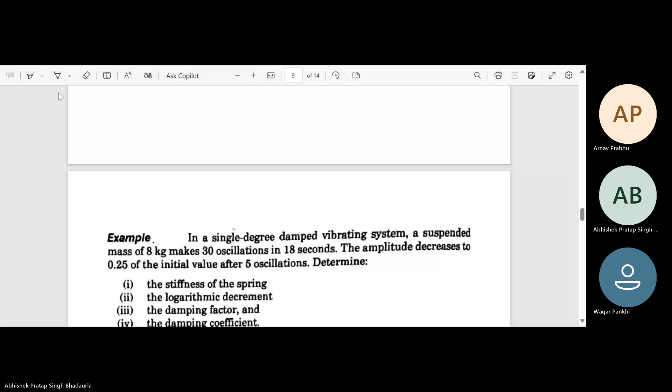So I'm going to share the screen. Can you see my screen properly? Yes, sir. Okay. So we had solved this problem last time. Now this is the problem we have to solve. I'm providing you 2 minutes.

Solve this problem. Determine the time in which the mass in a damped vibrating system would settle down to 1/50th of its initial deflection for the following data. The mass is 200 kg, epsilon, the damping factor, is 0.22, and S, the spring stiffness, is 40 Newton per mm. We also have to find the number of oscillations completed to reach this value of deflection. Take 2 minutes and try to solve it, and then we'll discuss the approach together.

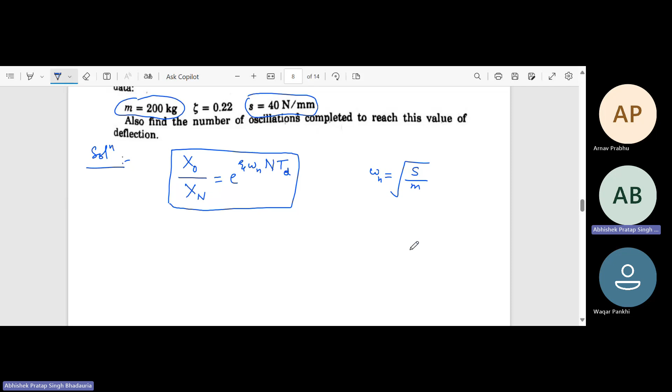The spring stiffness value is given as 40 Newton per mm, and the mass is also given. So put the values in this expression and you can calculate the natural frequency. So tell me, what is the value of this natural frequency? How much is it?

40 Newton per mm. Convert mm into meters, so 10 to the power minus 3 meters in the denominator goes to the numerator as 10 to the power 3. That means 40 into 1000 Newton per meter.

Okay, 40 into 1000 Newton per meter, and the mass is 200. So you can calculate the omega n value. So the calculated value of omega n is 14.14. What is the unit of omega n? Radian per second. Okay, this is the unit.

Now we have calculated this omega n. The epsilon value is given, the n value we need to find, and td is also required. Okay, so this is also required. So we'll see how to calculate this. So n td is unknown, so we'll put the value.

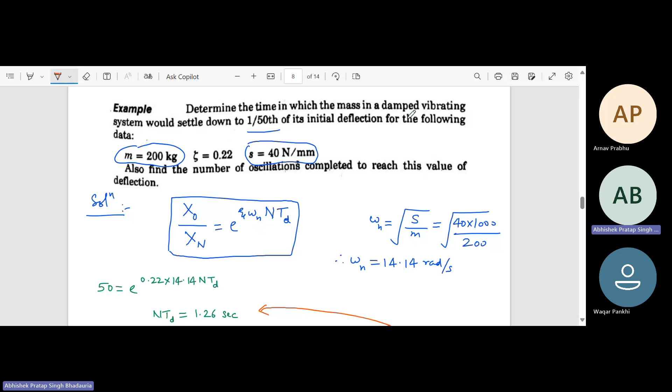This was asked, right? We have to determine the time in which the mass in a damped vibrating system would settle down to 1 by 50th of its initial deflection. So we have determined this time value, time period, and then after this we have determined the number of oscillations completed to reach this value of deflection. Okay, so this is the answer. N is equal to 2.76. Right?

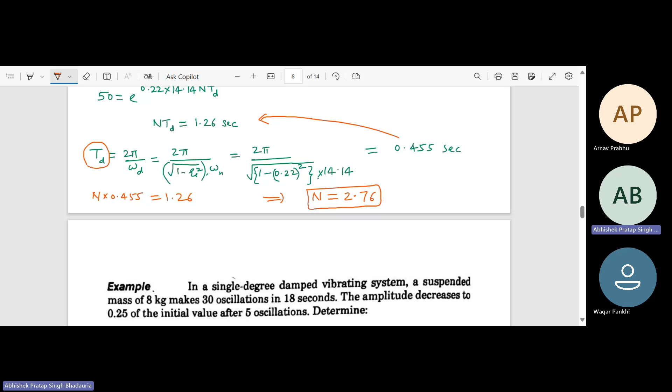Do this. In a single degree damped vibrating system, a suspended mass of 8 kg makes 30 oscillations in 18 seconds. The amplitude decreases to 0.25 of the initial value after 5 oscillations. Now we have to determine the stiffness of the spring, logarithmic decrement, damping factor, and the damping coefficient. So do this and tell me. Just take 1 minute.

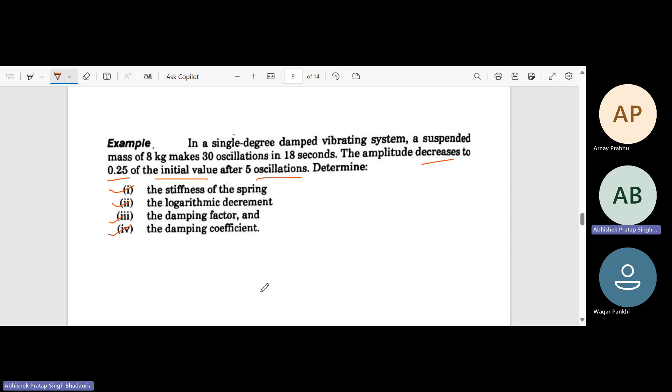Okay, so let's solve this problem. First of all, we'll find the first one. What is the first one? The stiffness of the spring. So let me write what is given in the problem. So what is given? Sir, mass is 8 kg, it makes 30 oscillations, and time is 18 seconds. Yes, mass is 8 kg.

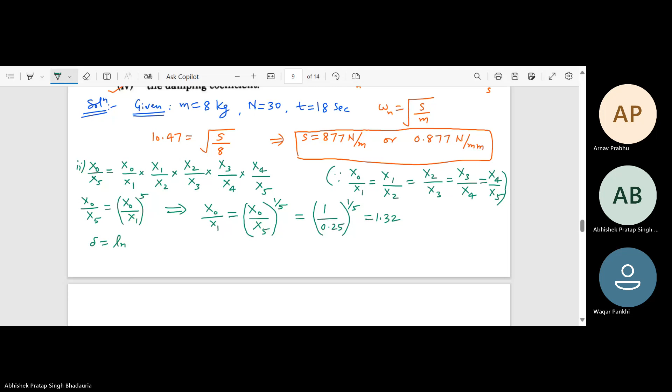So what is the delta? Delta is the logarithmic decrement. It is the natural logarithm of this amplitude ratio. So it is the natural logarithm of 1.32. So the answer is 0.278. This is the logarithmic decrement. So we have calculated logarithmic decrement also. Now let's calculate damping factor.

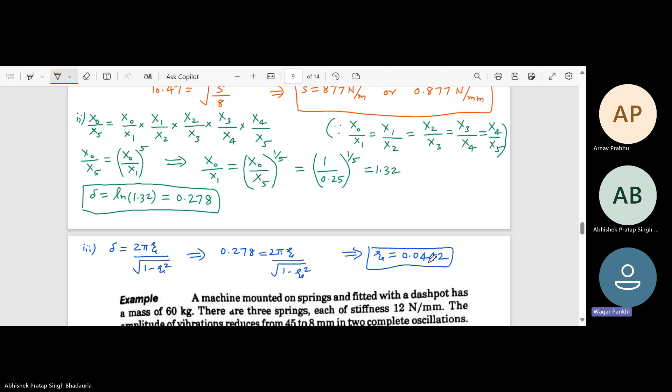So 2 into mass is 8 kg. Omega n, I've already calculated this, this is 10.47. And what is the value of epsilon? Epsilon we just calculated, 0.0442. We just solve this. So the value of C is 7.4 Newton per meter per second. So this is the answer. So we have calculated all the four.

Such type of problems are already asked a number of times in the exam. So understood? Okay, now let's solve another one.

A machine mounted on springs and fitted with a dashpot has a mass of 60 kg. There are three springs, each having stiffness 12 Newton per mm. The amplitude of vibration reduces from 45 to 8 mm in two complete oscillations. Assuming that the damping force varies as the velocity, we have to determine three things: the damping coefficient, the ratio of the frequency of the damped and undamped vibration, and the periodic time of the damped vibration. Think over it. I am providing you 1 minute, and then we'll solve this problem together.

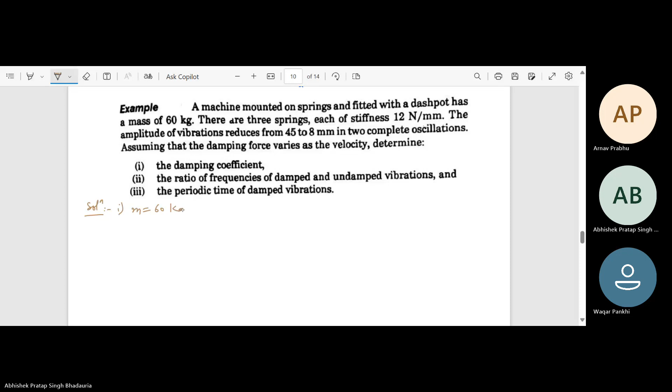So let's see, the mass is given as 60 kg. Stiffness is given as 12 Newton per mm.

So what is this - each, you can see here 3 springs are there and each having stiffness 12 Newton per mm.

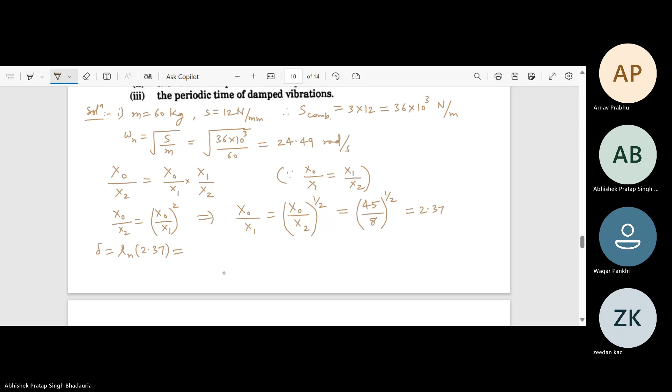Now we know the formula for delta - delta is equal to 2 pi epsilon divided by square root of 1 minus epsilon square. Just put the value of delta here, from here you will get one equation, one unknown, that is epsilon. So epsilon value you can find, the calculated value of epsilon is 0.136.

Okay, so we have calculated this damping factor, that is unitless. We know this, the damping coefficient, that is epsilon, that is 0.136. So done, first one we have solved. Okay, now let's work for the second one.

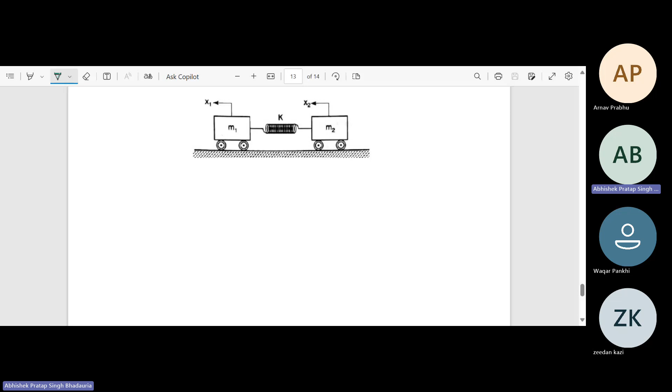Now we will move to module 2. More than half of module 2 is also already done. Just a few concepts remain which I will discuss, and then we will be able to finish module 2 as well. About 60 to 65% of module 2 is over. We just need to cover the remaining concluding part on tires, and we will be able to finish the entire syllabus for ISC, which is module 1 and module 2, in today's lecture.

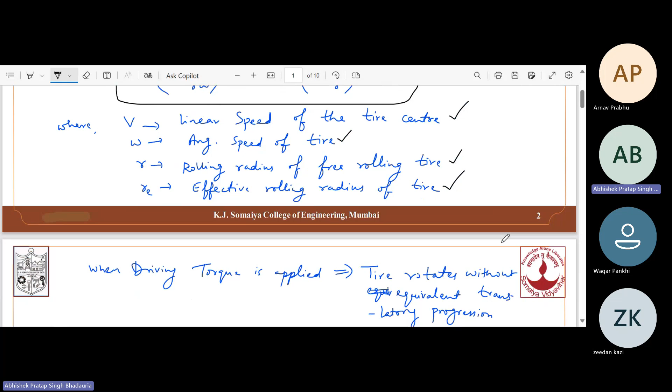Now we can see what happens when we apply the driving torque. When driving torque is applied, what is the effect of this? Due to this, the tire rotates without equivalent translatory progression. Okay, remember this, this is a very important aspect of tire mechanics. When we apply the driving torque, the tire rotates without equivalent translatory progression.

Okay, so basically we can say the product of R and omega will be greater than V, or simply we can say V will be less than R omega. Okay, so we will get the positive value of slip. You can see, देख सकते हो ना आप?

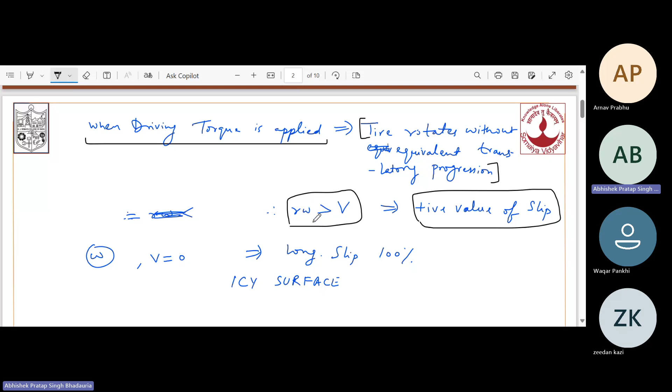V is less than R omega. Okay, तो यानी कि something less divided by a bigger number, so I will get a number less than 1. So 1 minus a number less than 1, that means I will get the i value, that is the longitudinal slip value, as a positive number. Okay, so we'll get the positive value of slip.

Now what happens when V is 0? Okay, जब V 0 होगा तब क्या होगा? Put the value here, V is 0. V अगर यहाँ पर 0 हो गया, that means i is equal to 100%, है ना? V is 0, so i is equal to 1 into 100, so that is 100%. Okay, so longitudinal slip will be 100%.

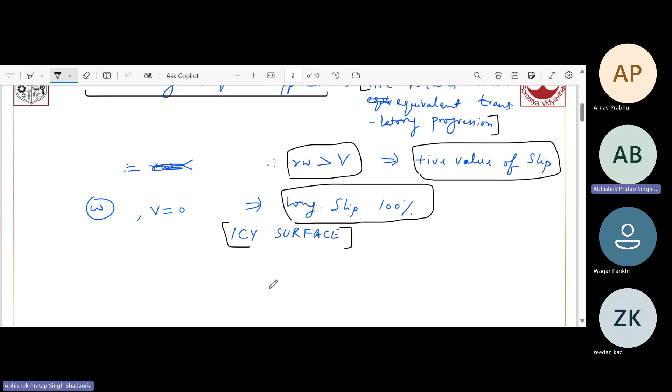And where can I see this 100% slip? On the icy surface, we can see this 100% slip. So this is the concept of tire slip, a very, very important one. Okay. Now let's move. Chalo.

So slip angle. Now we'll talk about the slip angle and the cornering force. I've already told you about this. The vehicle is moving on the road surface in some direction. That direction is known as the x direction, or the longitudinal direction. And the side direction is the y direction, known as the lateral direction. And the z direction is the vertical direction.

So along all these directions, the forces will be there. That is the longitudinal force, lateral force, and the vertical or normal force along the x, y, and z axis respectively, or we can say along the longitudinal, lateral, and normal direction respectively. Okay, and along these directions, the moments will also be there.

So we know how to calculate these forces and moments, what will be the effect of these forces and moments, and how to minimize them; that we have already seen. Okay, so I've already told you, if a vehicle is moving on the road surface in the x direction, that is the longitudinal direction, the side force, that is the lateral force, will act.

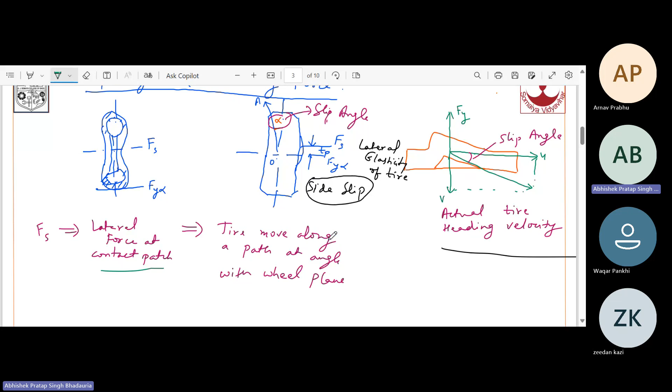Okay, so due to this, the tire moves along a path at an angle with the wheel plane. So you just see here, this is the longitudinal direction, and this is the actual direction of travel. A tilt is there. That tilt is nothing but an angle, so that angle is known as slip angle. So you just see here, there is Fs and Fy alpha. That is the side slip. So side slip you can observe.

So basically we can calculate it by getting the actual tire heading velocity. This is the velocity we can calculate with the help of this graph, and this is Fy. The direction of force you can see. So this is the mechanism for the slip angle and the cornering force. Now we'll see a very important concept: the longitudinal and lateral force at the various slip angles. This is a very important concept.

So you just see here, we are talking about the longitudinal and the lateral force at various slip angles. We know the longitudinal force will act along the longitudinal direction, and the lateral force will act in the lateral direction, in the side direction, and lateral force will be responsible for the slip angle. So what happens? The braking and accelerating will take place in the longitudinal direction. So the braking force and the accelerating force are nothing but the longitudinal forces. And what are the side forces? The cornering force and the side winds are the side forces, that is the lateral forces.

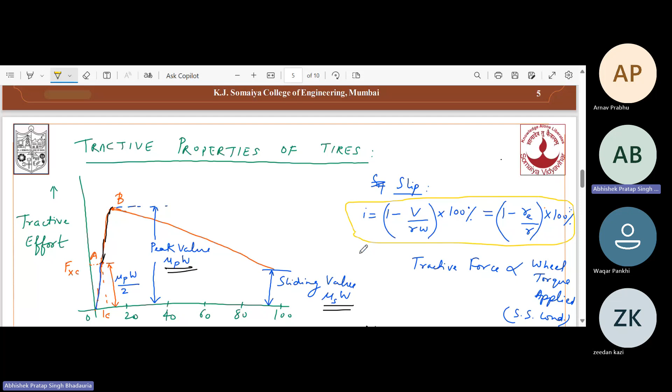So we know this tractive force will be directly proportional to the wheel torque applied. Okay, and this slip will be a function of tractive effort. We know the slip is a function of tractive effort, and tractive force is directly proportional to wheel torque applied. That means as the wheel torque increases, the tractive force also increases, and the slip is a function of tractive effort. Okay, so what is responsible for this initial value of slip?

So initially the slip is due to the elastic deformation of tire tread. Okay, that we have represented here in this sketch by OA. Okay, right. So basically, this is a very, very important one. Discuss the tractive properties of tires and show their variation with respect to longitudinal slip. Very important one.

Okay, so to show the variation with the longitudinal slip, we will draw a graph for the tractive effort with respect to longitudinal slip. So we have taken the longitudinal slip on the x-axis and the tractive effort on the y-axis. So you just see the figure. We will get a curve like this. Okay, so initially the slip is due to the elastic deformation of tire tread, generally denoted by OA in this figure.

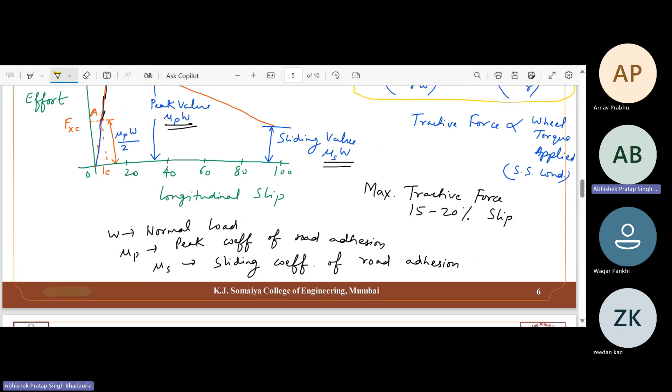Okay, and what is this AB? What can I say about this AB? This AB is the tire tread sliding on ground, and is it linear or non-linear? The relationship is non-linear. Remember this. Okay, so we can say this maximum tractive force will be at 15 to 20% of slip. Okay, so this we can comment.

Okay, right. So we'll move to another one. Okay, so now it is 6:47. Since we started late, we will conclude by 7:15. Chalo, okay. Yes, can you see my screen? The cornering properties of tire on your screen? Yes, sir. Okay, fine.

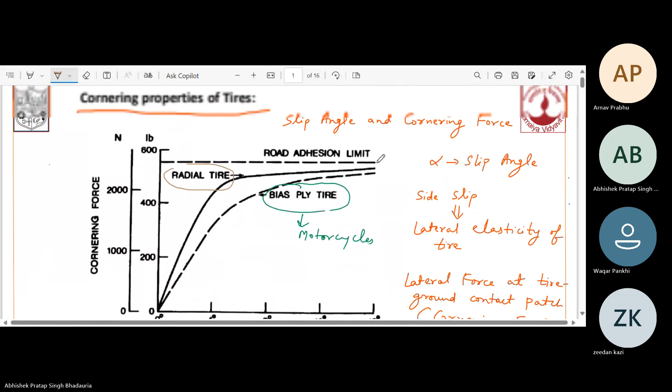Okay, so here you can see alpha. We have used this symbol for the slip angle. And what is side slip? The lateral elasticity of the tire is responsible for the side slip. So side slip will be due to this lateral elasticity of the tire, since we know the tire provides the primary source of suspension. Okay, now you can see here.

Lateral force at tire ground contact patch. So the cornering force will be there, that is known as Fy alpha. So basically, when the camber angle of wheel is equal to 0, we'll get this. The cornering force increases at a lower rate with increased value of slip angle, when the camber angle of wheel is equal to 0. Now if we talk about this, we can say that it reaches the maximum value.

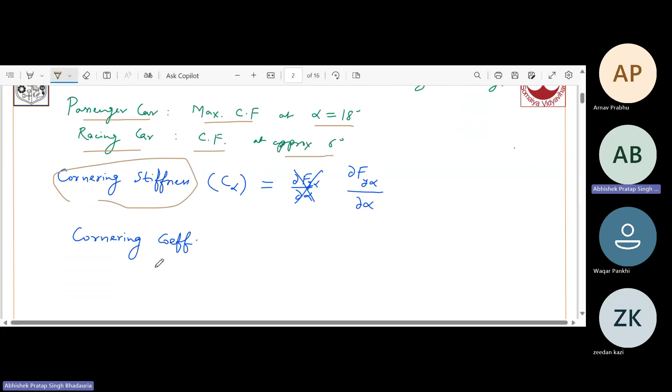So if we talk about the passenger car, the maximum cornering force will get at slip angle value equal to 18 degree. And if we talk about racing cars, cornering force will get at approximately 6 degree. So the cornering stiffness, C alpha, is nothing but dFy alpha divided by d alpha. Okay, so this is the cornering coefficient.

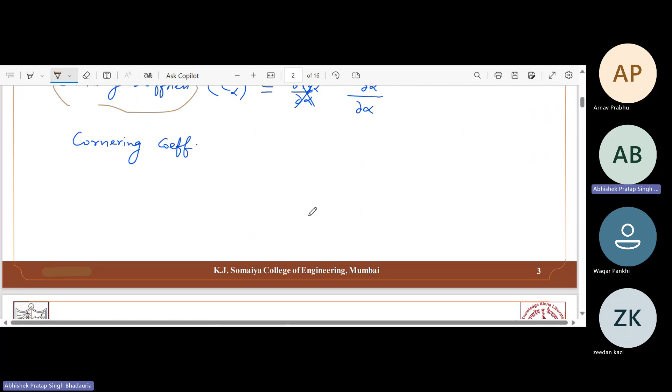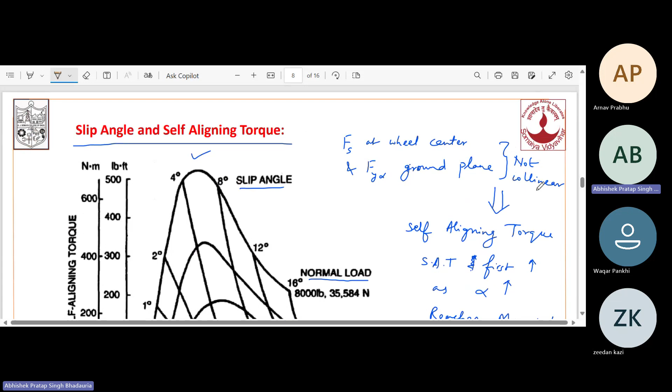This force value Fy alpha at the ground plane and this force value Fs at the wheel center are not collinear forces. So due to this, the self-aligning torque will be there. What is the observation with the help of this graph? The self-aligning torque first increases as alpha increases.

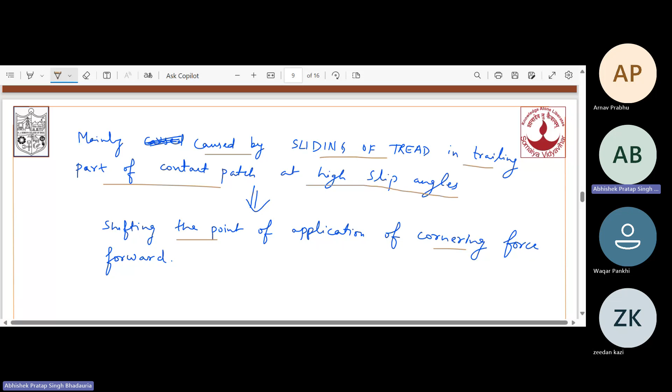Now the camber and the camber thrust. We've talked about camber earlier when I started with the tire - camber, caster, toe in, toe out, kingpin inclination. We are going to study all these things in detail in module 4, that is steering. This is also a part of this steering geometry.

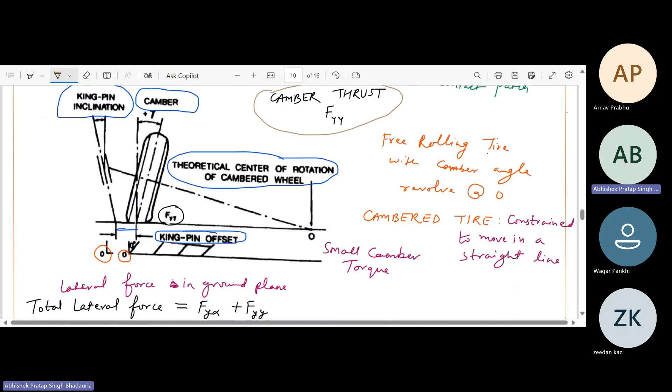Due to this, a small camber torque will be generated, and the lateral force in the ground plane is there. So we can calculate the total lateral force: Fy alpha, the force at the contact patch, and Fyy, that is the camber thrust. We add the camber thrust and the force at the contact patch to calculate the total lateral force.

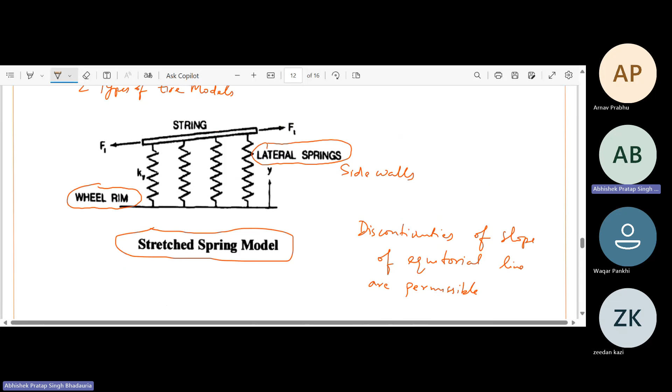This is the stretched spring model, based on the assumption that the tread of the tire is equivalent to a stretched string restrained by lateral springs, representative of the side wall with the wheel rim acting on the base of the springs. This shows the discontinuities of the slope of the equatorial line, which is permissible in this case.

So the first model is the stretched spring model. Based on the assumption that the tread of the tire is equivalent to a stretched string restrained by lateral springs, representing the sidewall with the wheel rim acting on the base of the springs, this is how we express our tire model as a stretched spring model. The discontinuities of the slope for the equatorial line is permissible here.

Now the next model is the beam or elastic foundation model. Here you can see the continuous lateral elastic support. In this beam model, the tread is considered equivalent to an elastic beam with continuous lateral elastic support.

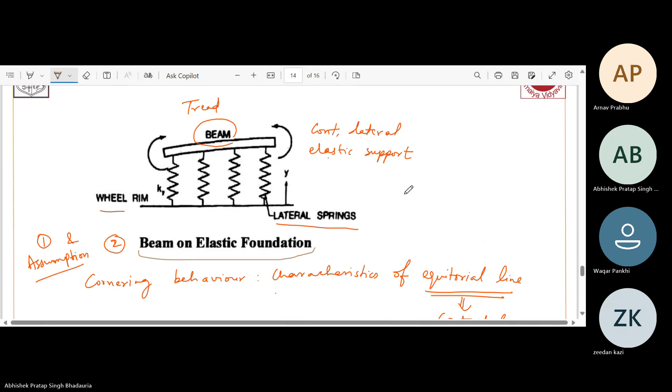So if we talk about cornering behavior, it is due to the characteristic of the equatorial line, and finally, where it is at the contact line.

Okay, it is at the contact line. So what do you mean by equatorial line? I'm talking about this equatorial line of the tire, which is nothing but the intersection of the undeformed tire tread with the wheel plane.

So what is the equatorial line of the tire? The intersection of undeformed tire tread with the wheel plane. That line, where the undeformed tire tread meets the wheel plane, is known as the equatorial line of the tire.

And this position of the equatorial line in the contact area is called the contact line. So now we understand the equatorial line: it is the intersection of undeformed tire tread with the wheel plane. And what is the contact line? The position of the equatorial line in the contact area is called the contact line.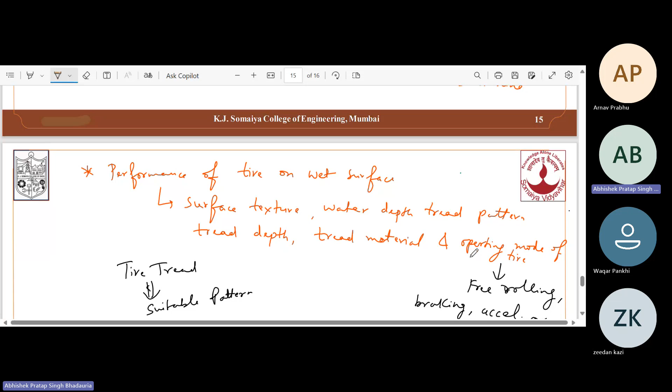So the performance of the tire becomes very important as far as different surfaces are concerned. That's why tire testing is required on different road surfaces. Performance of the tire on wet surfaces is one of the very important and crucial aspects. What are the factors on which this performance depends? The factors are surface texture, water depth, tread pattern, tread depth, tread material, and operating mode of the tire. Operating mode means whether it is free rolling, braking, accelerating, or cornering, and whether the tread pattern is suitable or not.

What about hydroplaning? Hydroplaning and aquaplaning are very important concepts. When a vehicle is moving on a road surface, some quantity of water is there. Some of it the tire surface disperses, but if the water content on the road surface is too much, it cannot fully disperse, and a number of problems will be there.

We have already explained hydroplaning and aquaplaning in detail with a neat sketch, its effects, and how to minimize it, including the best possible solution. Now, if we talk about ride properties, it is very important to study them to improve ride quality. We need to analyze the ride property of the tire for the static condition, the non-rolling dynamic condition, and the rolling dynamic condition.

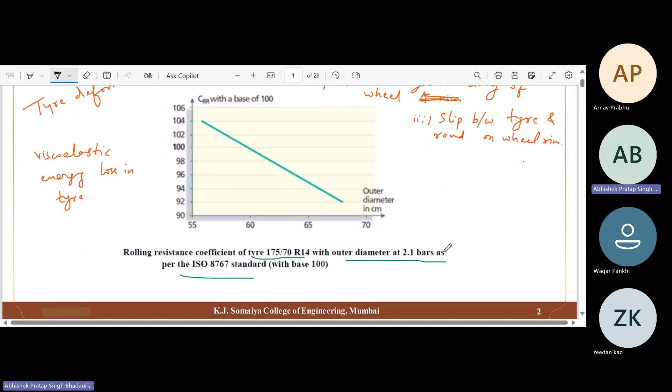So tire deformation becomes very important, and viscoelastic energy loss will be there in the tire. So you can see the influence of tire size.

See this: the rolling resistance coefficient of the tire with outer diameter at 2.1 bar, as per ISO standard, varies like this. The rolling resistance coefficient decreases as the diameter increases — it is a decreasing type of behavior. We need to focus on these parameters: tire radius, width, inflation pressure, normal load, and velocity.

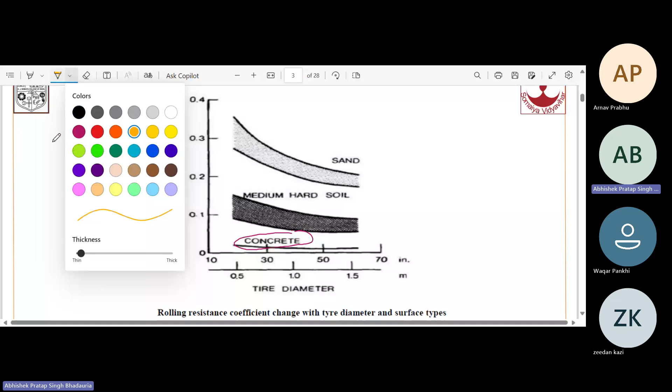Now let's move to the variation of the coefficient of rolling resistance with respect to tire diameter. Here the road surfaces are different: concrete road, medium hard soil road, and sand road surface. So different road conditions are shown, and we have to show the coefficient of rolling resistance with respect to tire diameter. As the tire diameter increases, this coefficient of rolling resistance will decrease.

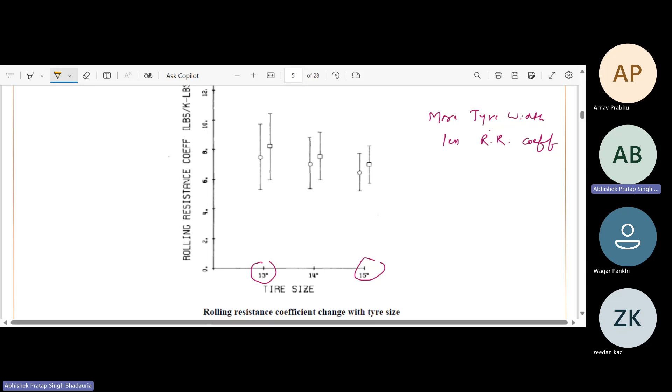Now here we can see the rolling resistance coefficient variation with the help of tire size. So with more tire width, the less rolling resistance coefficient will be there.

Now you can see the variation of this rolling resistance with respect to pressure. As the pressure increases, this rolling resistance coefficient decreases. You can see the value at the various major locations on this graph itself.

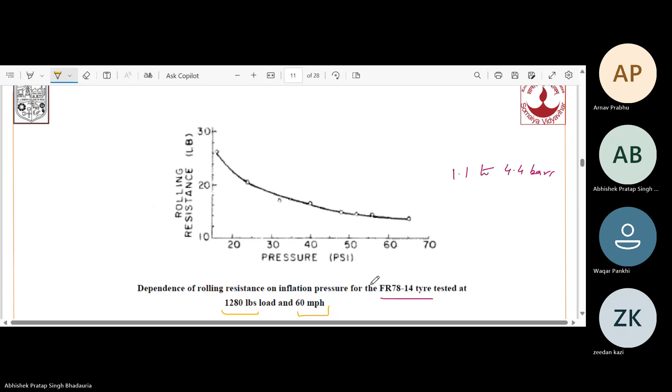Now you can see here the value of rolling resistance coefficient with respect to vertical force. It depends on the type of tire - we cannot decide whether it will increase or decrease without knowing the type. Basically we need to know what is the type of tire, and on that basis we can comment whether it will increase or decrease.

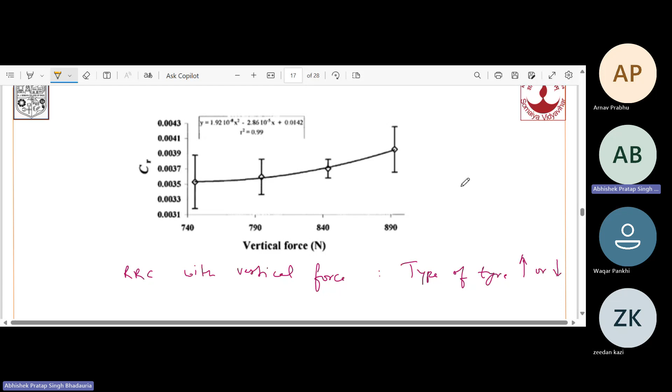Now, what is the influence of longitudinal velocity? We can show the variation of this coefficient of rolling resistance with respect to speed.

For the different types of tires. Okay, so you can see the variation of the coefficient of rolling resistance with respect to the longitudinal velocity or the speed for the different types of tires like radial tire, bias tire, and any other type of tire for the various car tires' rated condition.

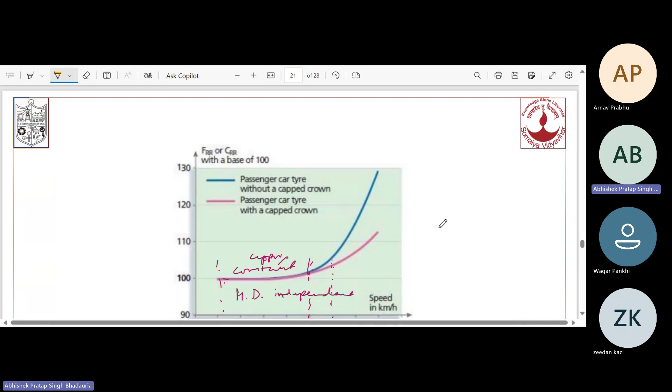This variation we got after n number of testing of the various tires. So this construction of the various tires, which we had studied at the start of this module, becomes very important. Now we can see here what is the variation of this FRR with respect to the speed. So we have shown this for a passenger car.

So you just see here the blue one. This shows the passenger car tire without a capped crown, and the pink one shows the passenger car tire with a capped crown.

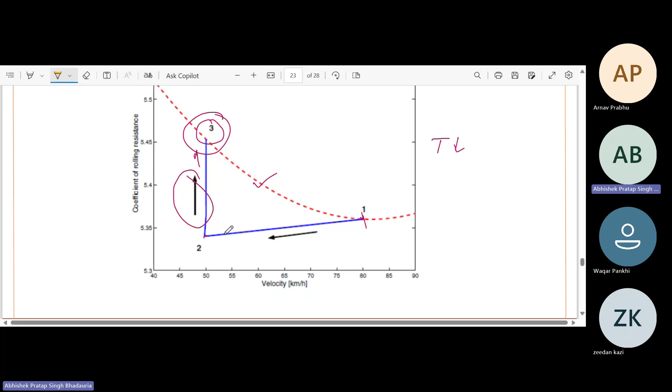As the velocity increases, this coefficient of rolling resistance decreases. So on the basis of this standard nature we'll draw a curve which will pass through the initial position and the final position. तो इस तरह का कर्व मिल जाएगा आपको.

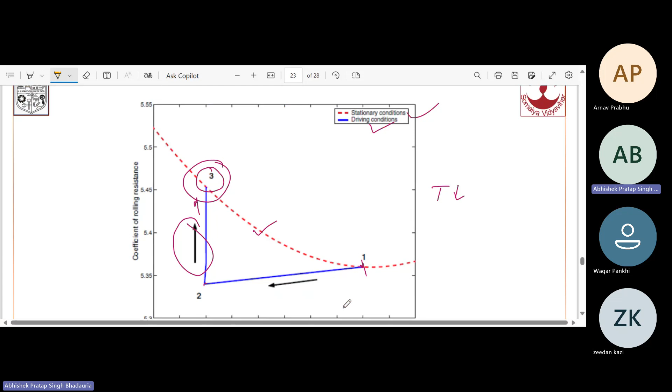Okay, so, okay, just give me a minute.

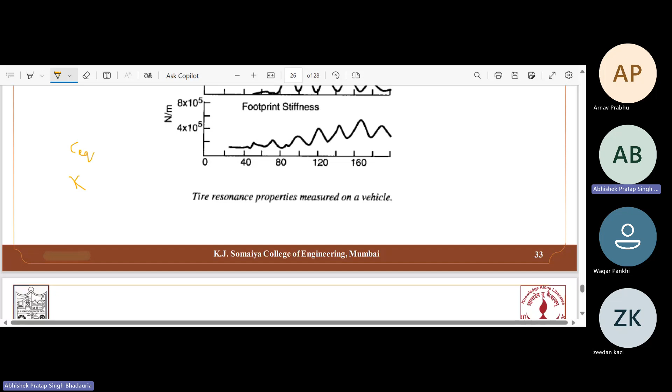A damped natural frequency of the tire with mass m can be identified from the amplitude decay trace. T क्या होता है? T is equal to 2 pi by omega d. यहाँ से हम omega d calculate कर लेंगे, 2 pi by T. This is how we can do this.

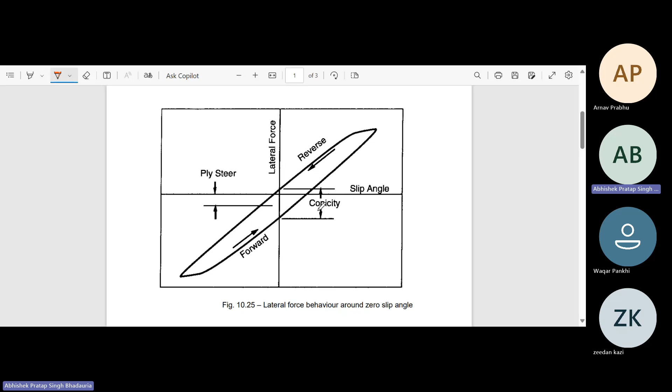This is conicity. Okay, so we have shown here the ply steer also. We can represent this on the basis of the slip angle. So lateral force behavior around zero slip angle: we have to see what is the behavior of the lateral force around the zero slip angle. So this is the behavior of the tire at the zero lateral slip condition. Okay, nearly, approximate value.

So this is very important. The refinement is required for this, for the high speed automobile. So for an ideal tire, the zero lateral force coincides with the zero slip angle. I've already told you what is responsible for slip angle. Lateral force is responsible for slip angle. So if the lateral force is maximum, the lateral slip angle will be maximum, and if the lateral force is zero, the slip angle will be zero.

Okay, but for actual tires, this is not a true fact. This is for the ideal one. For actual tires, the behavior of the lateral force at a small slip angle will be similar as shown in this figure here. In this plot, the lateral force is plotted as the tire is rolled in both the directions. That means here we have shown the tire is rolling in the forward and the reverse direction.

The important observation is the lateral force behavior differs with the direction of rotation. It will be different in the forward direction, different in the reverse direction, and an offset will be there from the origin of the graph. So basically, accounting for this behavior is the conicity in the tire construction. So conicity is nothing but the side to side differences in the tire, such as asymmetrical offset in the positioning of the belt. That's why the name is given.

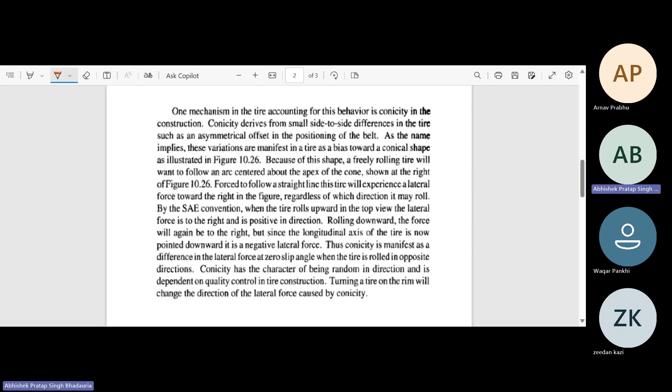So conicity has a character of being random in direction, and it is dependent on the quality control in the tire construction, and this is how it can improve the tire performance and ultimately improve the quality of the ride. Turning a tire on the rim will change the direction of the lateral force caused by the conicity. So basically rolling downward, the force will again be to the right, but since the longitudinal axis of the tire is now pointed downward, it is a negative lateral force. And in this way, we can identify the direction.

Now, another mechanism that can be present in a tire is ply steer, which arises from the angle of the cords in the belt layers. So to avoid this bias in the tire's rolling direction, belts are constructed with alternating belt layers at opposite angles. For this, perfect balance is required, but perfect balance is impossible to achieve. So a free rolling tire will have a tendency to drift from its direction of heading. This we have shown in the figure.

So when rolling in one direction, it creates lateral force to the right, and this we can show in the tire axis system given by SAE. When rolled in the opposite direction, it will exhibit a force to the right in the SAE tire axis system. So when the tire lateral force properties are measured in the vicinity where the slip angle is nearly zero, ply steer has a non-zero offset in the lateral force averaged from both directions of travel. So ply steer is dependent on the tire design, nearly equal in magnitude and direction for all tires of common design.

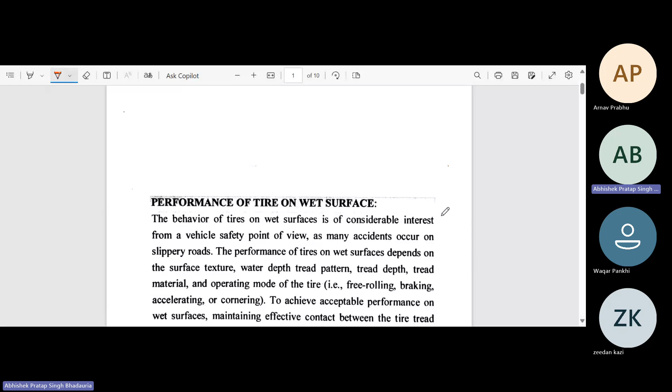Okay, so now we'll move to this performance of the tire on wet road surface. After this I will conclude this lecture. So this is very important: what is the performance of the tire on the wet surface? Hydroplaning is there, which I've already discussed in detail. What is the performance of the tire on the road surface which is wet?

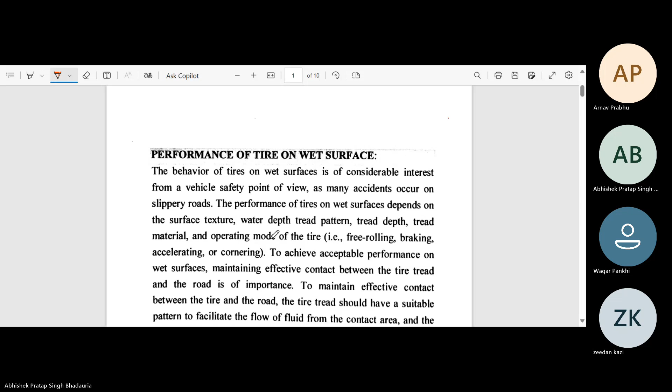So if more amount of water is there, it will be difficult for the tire surface to disperse all the water. So problems like hydroplaning or aquaplaning may arise. This we have already discussed in detail in the previous lecture.

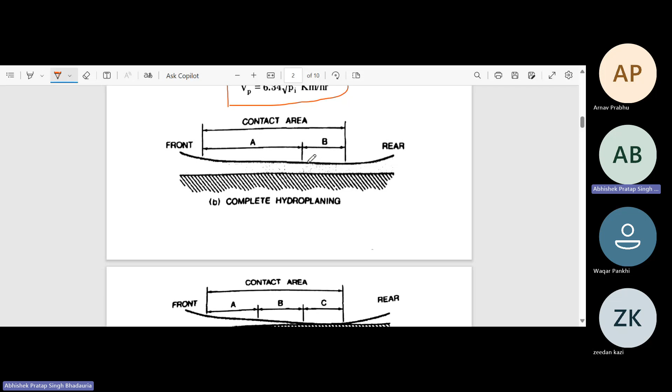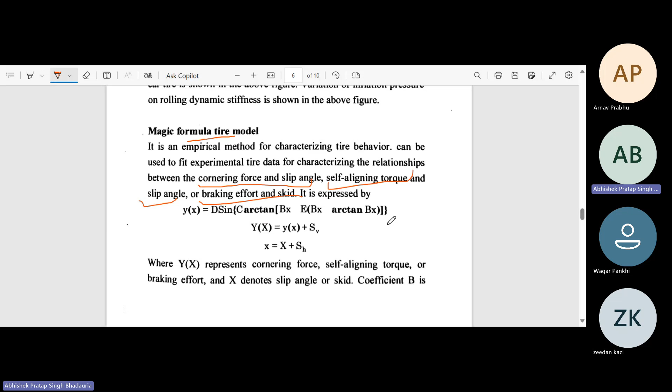So it is expressed by this expression: capital Y is equal to small y(x) plus SV, and small x is equal to capital X plus SH, where y(x) represents the cornering force, self-aligning torque or braking effort, and capital X denotes the slip angle or skid. B is called the stiffness factor, C is the shape factor, D is the peak factor, E represents the curvature factor, and SH and SV are the horizontal shift and the vertical shift respectively.

So we can make the interpretation of this equation. The first equation produces a curve that passes through the origin, and at the origin the x value will be equal to 0 and the y value will be equal to 0. It will reach a maximum value at x equal to xm, that we have shown in this

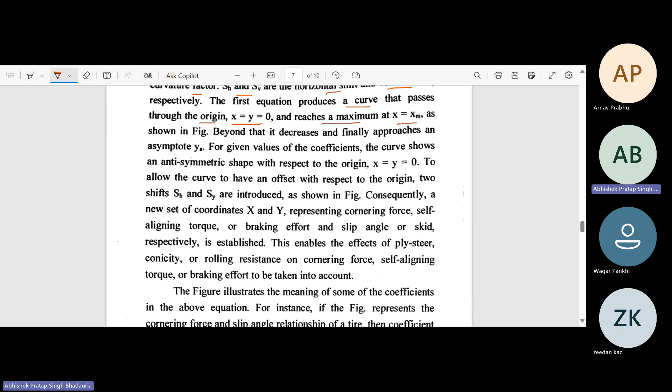X and Y value will be 0. To allow the curve to have an offset with respect to the origin, two shifts will be there, SH and SV. So a new set of coordinates we can get, capital X and Y, that will represent the cornering force, self-aligning torque, or braking effort, and slip angle or skid. These values we can establish.

So this enables the effect of ply steer, conicity, or the rolling resistance on the cornering force, self-aligning torque, or the braking effort to be taken into account. This is the importance of this tire magic formula. This figure illustrates all this information. The magic formula is capable of producing characteristics that closely match the measured data.

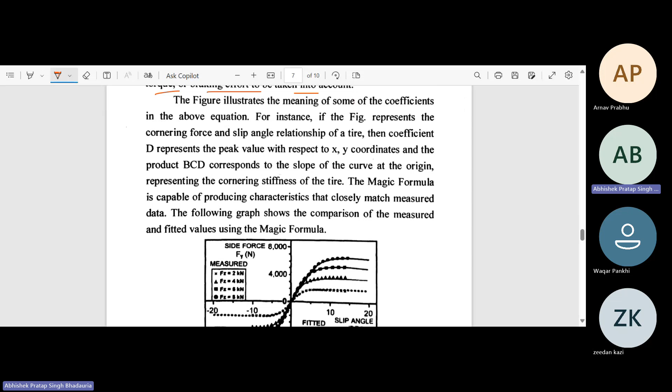We can see the graph that shows the comparison of the measured and fitted values using this formula: the self-aligning torque variation with respect to slip angle for the various forces, 8 kilonewton, 6 kilonewton, 4 kilonewton, 2 kilonewton. This we have done after the experimental testing and data collection, and then we have calculated these results. This is the variation.

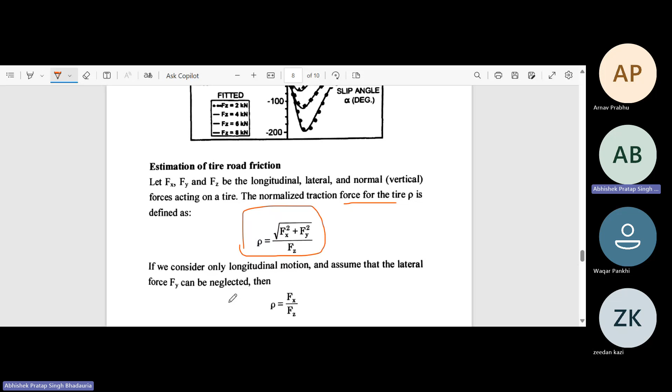Estimation of the tire road friction. Fx, Fy, and Fz are the longitudinal, lateral, and normal force on a tire. So the normalized traction force of the tire we can calculate by this expression: square root of Fx square plus Fy square, divided by Fz. If we consider only longitudinal motion, the lateral force Fy is neglected, so Fy will be 0. The square root of Fx square is Fx only. So rho, the normalized traction force, will be equal to Fx by Fz.

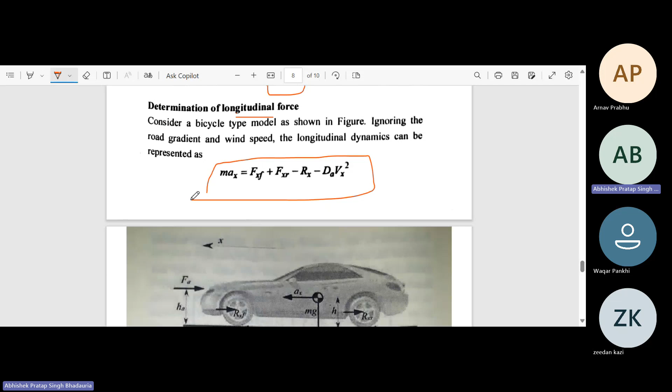Now, how can you determine the longitudinal force? Here we have shown a bicycle type model. We have neglected the road gradient and wind speed here. So as per the longitudinal dynamics, we will get this expression. Here this is the model. You can see here.

This is a point where the whole mass or the whole weight of this car will act. This is mg. Now what is this? This is our front wheel, and this is our rear wheel.

Now the distance between the center of the front wheel and the center of gravity, let us represent this by LF, and the distance between this center of gravity and the center of the rear wheel is LR. Okay, reaction will act at the contact surface of this front tire surface and the road surface. This is FZF, and the reaction that will act at the contact point of this rear tire surface and the road surface,

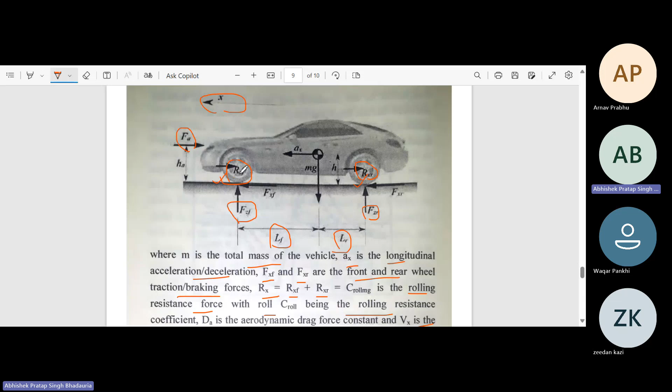Okay, so LF is the distance from the center of gravity to the front axle. LR is the distance from center of gravity to the rear axle. So what will L be? L is the total. LF plus LR is L. That means center to center distance, the distance between the center of the front wheel and the center of the rear wheel. By the wheelbase of the vehicle, the total longitudinal tire force Fx we can calculate with the help of this expression. Fx is equal to FxF plus FxR.

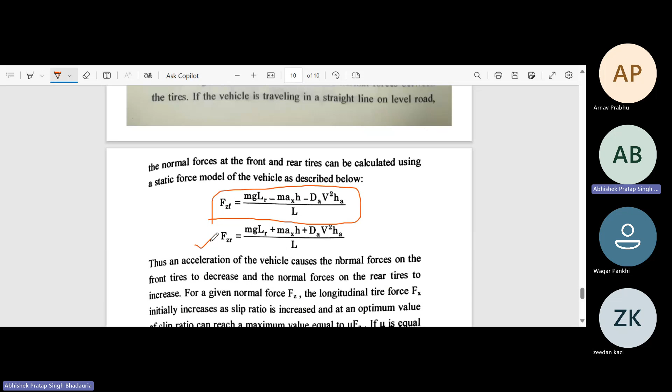This is the mathematical expression for calculating the normal force at the front wheel, and this is the expression for calculating the normal force at the rear wheel. Okay, so weight of the vehicle contributes the major part of this normal force. Longitudinal acceleration and deceleration forces acting on the vehicle will be responsible for the redistribution of these normal forces between the tires. So if a vehicle is traveling on a straight road surface, normal force at the front and rear tires can be calculated with the help of these expressions.

Okay, so acceleration of the vehicle causes the normal forces on the front tires to decrease and the normal forces on the rear tires to increase. This is the way we can calculate. So if mu is equal to 1, maximum longitudinal force generated can be as much as the normal force Fz, and this will happen at the optimum value of slip ratio. And if mu is less than 1, the maximum longitudinal force that can be generated is only a fraction of this normal force Fz.

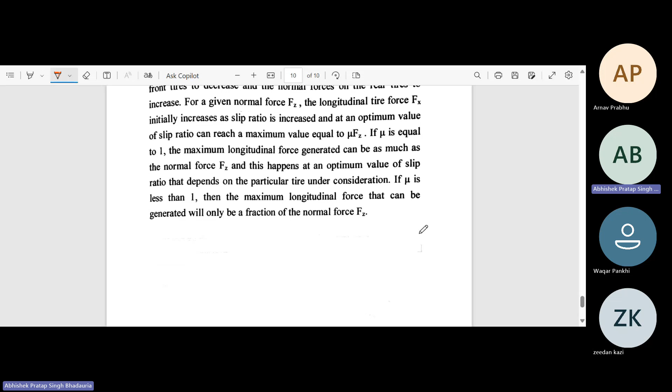Okay, so this is how we can make the analysis. We can calculate the normal force for the front wheel, normal force for the rear wheel, and in fact we can do some experimentation. Okay, so I will stop here. So we have completed the second module in all respects.